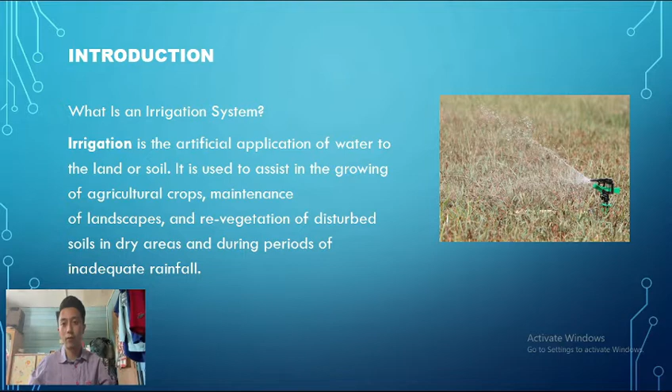So why is irrigation so important? The first one is it's an essential part of our daily lives. The second one is vast improvement in agricultural production, which is food production. The third one is increased labor employment. The fourth one is assured economic vitality, and the fifth one is awareness of the improvement we could make to already marketed products.

For project background, currently irrigated agriculture is caught between two opposing viewpoints: some believe that agriculture is inefficient because it grows water-guzzling crops, while others believe that irrigation is necessary for the production of sufficient food in the future, given the expected increase in food demand due to global population growth and climate change.

Irrigation is important for economically successful agriculture in arid and semi-arid regions, while it is frequently required as a supplement in semi-humid and humid locations. Water is necessary for the human population, as well as other animals, plants, and bacteria around the world, to have a sufficient food supply and a productive environment.

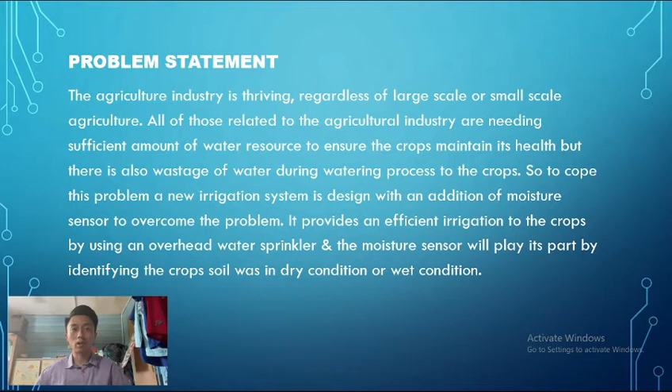To cope with this problem, a new irrigation system is designed with the addition of a moisture sensor to overcome the problem. It provides efficient irrigation to the crops by using an overhead water sprinkler, and the moisture sensor plays its part by identifying whether the crop soil is in dry condition or wet condition.

The project objectives are: first, to develop a fully automated smart water irrigation system by using microcontrollers such as Arduino. Second, to monitor and control the system through IoT mobile applications such as Telegram. Third, to create a system in agriculture that can comply with water saving, by using a moisture sensor to detect the presence of moisture in the soil to help the system identify whether the soil is in dry or wet condition.

For the scope of the project, the first one is the Arduino microcontroller, which functions as the brain of this project and controls all the components used in this project. The second one is the IoT mobile application, which functions to monitor and control the system. The third one is the soil moisture sensor, which functions to detect moisture in the soil.

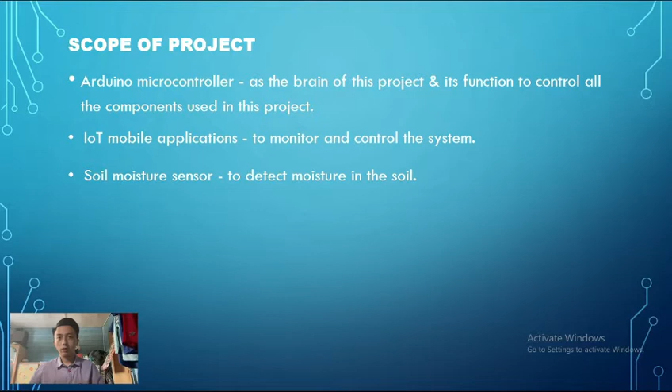The fourth one is the DC supply, which functions to supply voltage to the Arduino microcontroller and the circuit. The fifth one is the DC motor, which functions to move the irrigation bar. And the last one is the water pump, which functions to supply water to the irrigation bar.

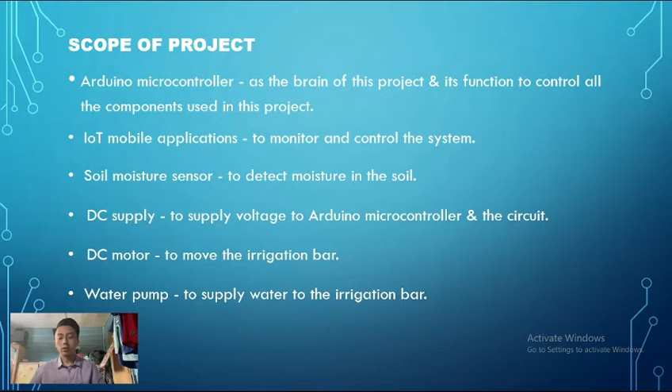For the literature review, there are 3 journals that have been summarized. The first one is Smart Sensor for Automatic Drip Irrigation System for Paddy Cultivation, by Barkunan SR, Bhanumathi V, and Sethuram J, 2019. The technique is how drip irrigation is used to enhance the use of water assets for improving the harvest yield.

The second one is Development in Sprinkler Irrigation Technology in China, by Yan H et al., 2020. The technique is how sprinkler water system innovation was in the phase of experimentation and investigation.

The third one is a smart irrigation system, by Ghosh, Arijit et al., 2018. The technique is an irrigation system which can estimate the moisture of the soil and automatically turn on and off the water supply.

For the methodology part, this is the flowchart of the project. When the system starts to initiate, it will go through the mobile phone app first, then the microcontroller initialization, then the moisture sensor to read the sensor values.

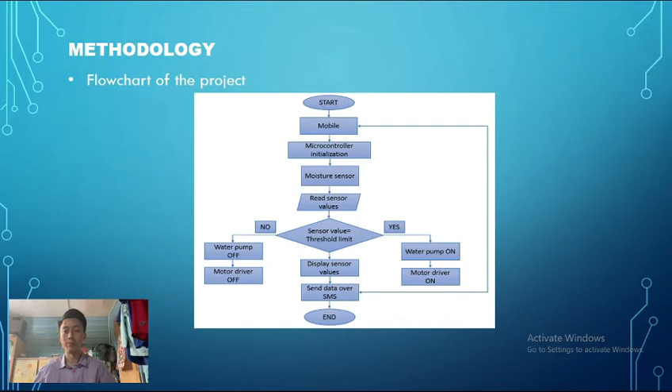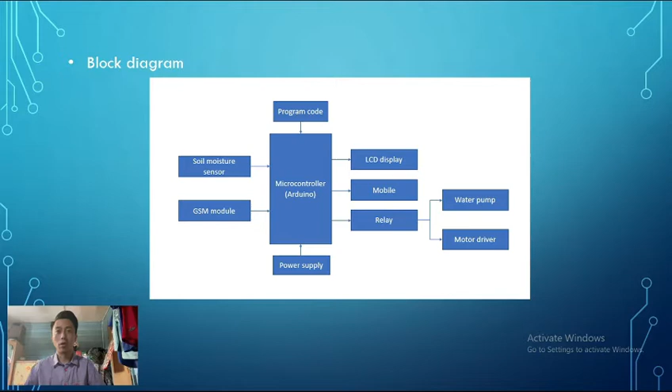For the block diagram, this is the block diagram of the system. It contains a microcontroller, which is the main component. The input is program code, power supply, soil moisture sensor, and GSM module. The output is LCD display, mobile app, and relay, which contains the water pump and motor driver.

For the initial result, this is the circuit design. Arduino is the main component in this circuit. Soil moisture sensor is used to detect the soil moisture. Ultrasonic sensor is used to detect water level in the tank. GSM module is to monitor the system, and the LCD display shows the value from both sensors.

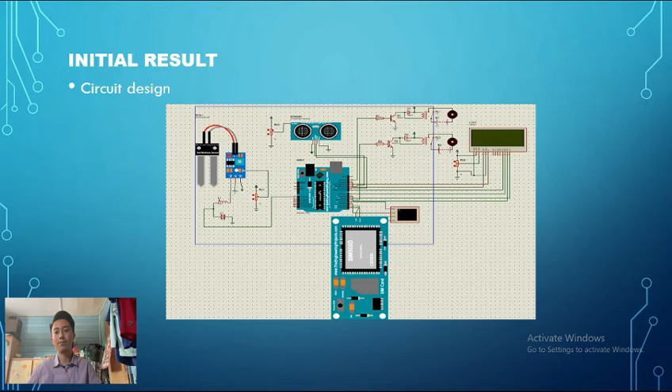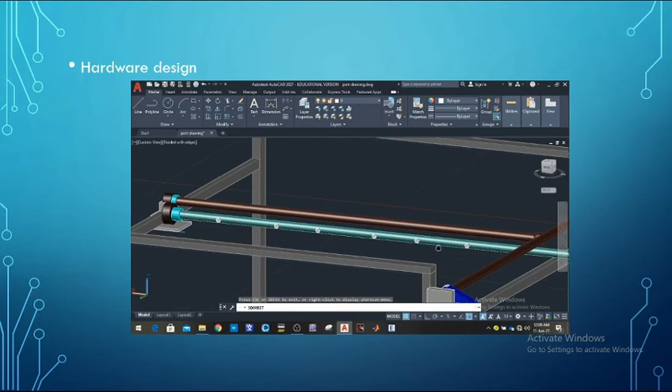If you look at this, this is the irrigation bar. At the irrigation bar, there is also a hose attached. On the hose you can see this hole that is punched through, and it acts as a nozzle, so the water will be supplied through it.

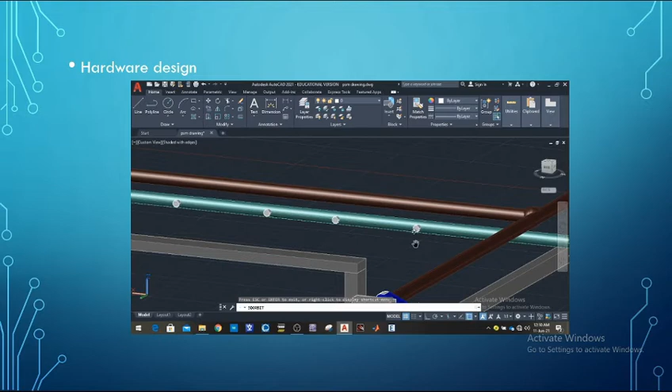Later on in PSM2, a motor driver will be installed here, so it functions to move the irrigation bar forward and reverse, so the water will be poured to the soil beneath it.

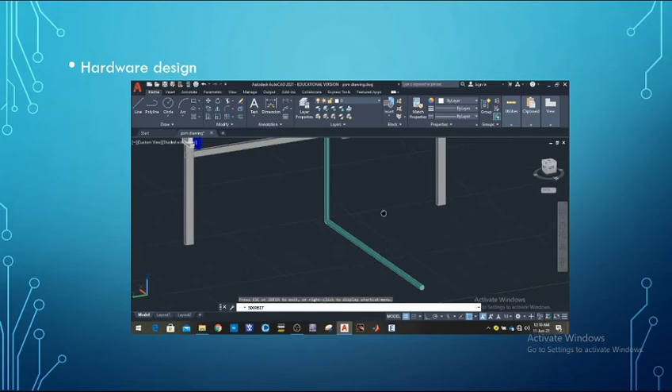The water pump will also be installed somewhere around here, and its function is to supply water to the hose, which will be poured through the hole over here. So that's all for my design.

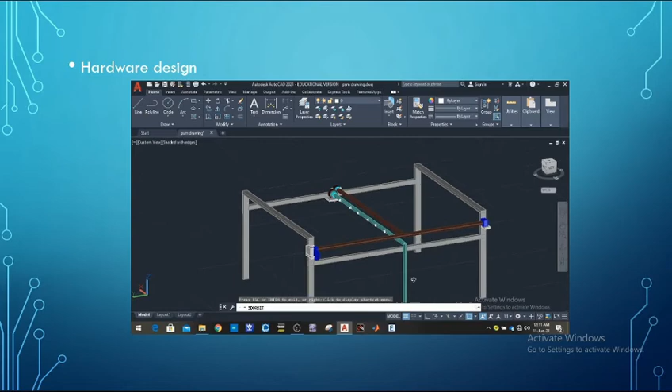As a conclusion, this project explains the development of a smart water irrigation system with IoT controlling base, especially for the agriculture industry. After the experimental period is completed and the data has been analyzed, it shows that this project is able to achieve its objective.

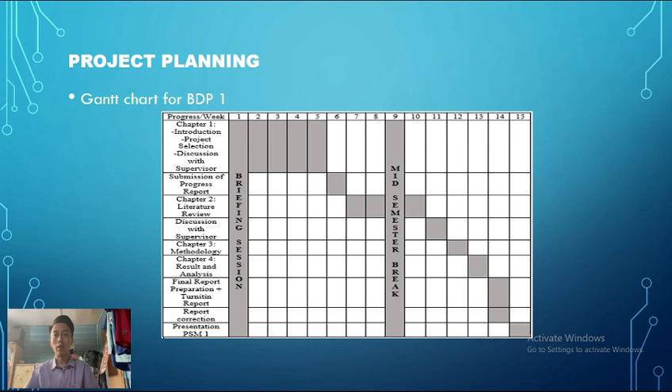The progress on Chapter 3, methodology, is on week 12. The progress of Chapter 4, result and analysis, will be on week 13. The progress on final report preparation plus Turnitin report, and also report correction, will be on week 14. And the last one is presentation on PSM 1, which is on the last week of the semester.